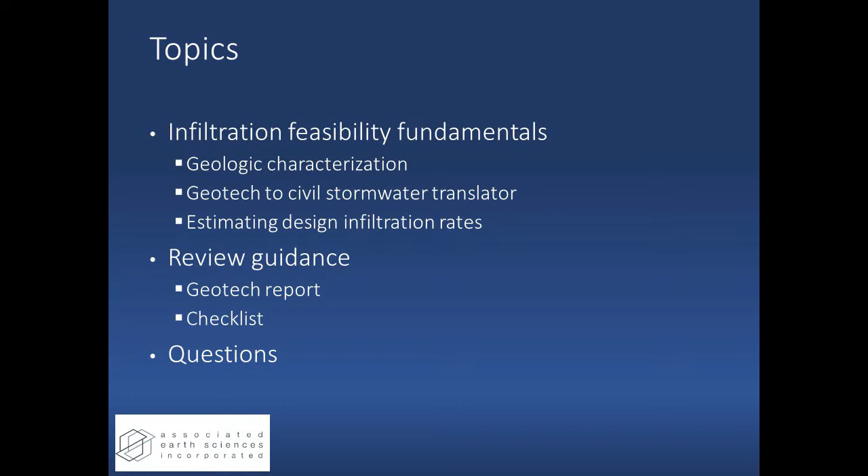Thank you for going through the abstract. That just covers what we're going to talk about today. So I'll just keep on going because there's a lot in there that I want to cover.

So as a geotech, I'm a hydrogeologist, work with geotech engineers. Hydrogeologic characterization, geologic characterization, it's, from our perspective, the #1 part of the stormwater plan. A lot of this conference has been on the water quality components. This is all about flow control. So when we want that water to soak in the ground for flow control, when it's infiltration, that's where the subsurface characterization is very important.

Think about the ground as your underground pipes. So the pore spaces between grains, the layers of materials, that's your pipes. And you need to understand how they're deposited to understand their flow carrying capacity. So these 3 bullets, thickness, lateral extent, where's the perching layers and the water table, and then that permeability in the vertical direction, those will be themes we'll touch on throughout.

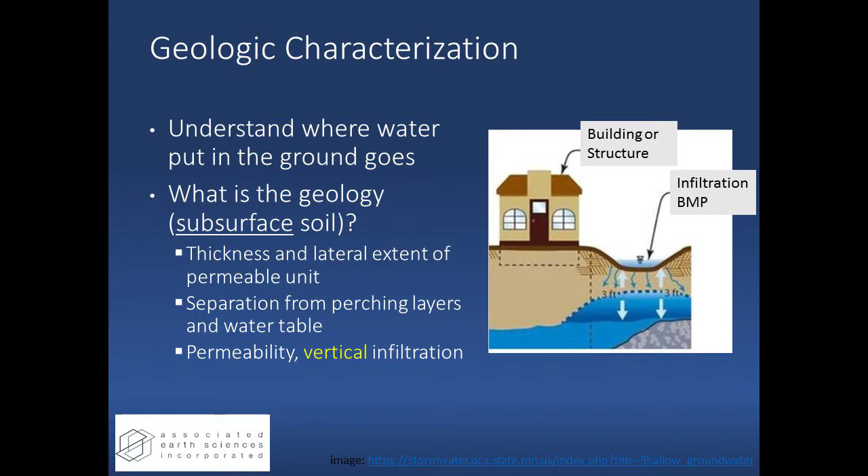So who knows who Karl Terzaghi is? Geotech engineer, father of geotechnical engineering. So this was an engineer who recognized that how sediments are deposited are key to predicting their behavior between widely spaced boreholes or widely spaced tests.

It's really hard to predict the subsurface because you can't see it. You get these little tiny windows into the subsurface. How do you predict conditions between those 2 locations? It comes back to understanding the geology. How were the sediments deposited?

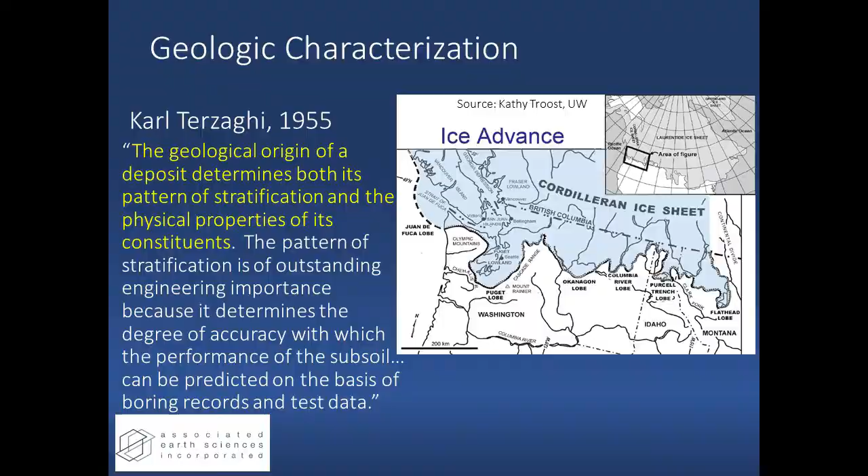So this is a Puget Sound centric talk, but the concepts here apply statewide. But Puget Sound in particular, we had the glaciers come down over 6 times in the last 2 million years, and they left behind a very complicated subsurface story. So I want to just lightly touch on this because there's 2 key units that the ice sheet left behind.

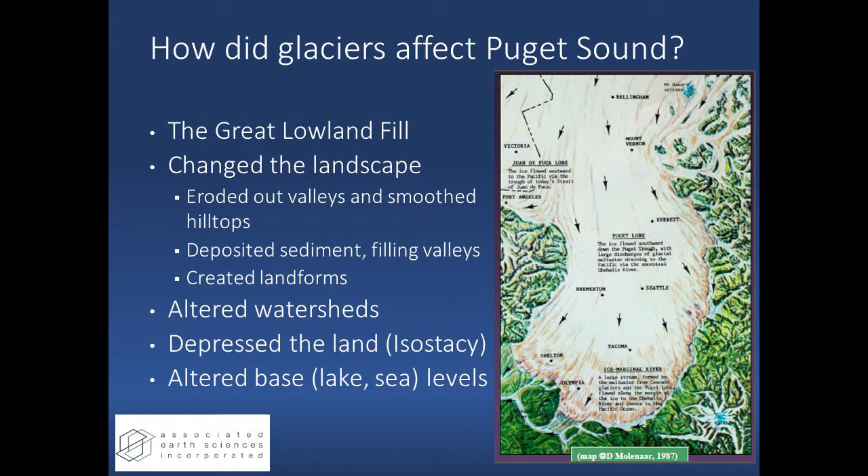Derek Booth, a local yokel, worked for King County, went off and is a worldwide expert now on stormwater, but he worked at the county in the 80s and then UW in the 90s, and spent a lot of time characterizing geology and groundwater flow. And so I recommend that everybody read his paper. It's really good. And it forms some of the basis for the hydrology we see locally,

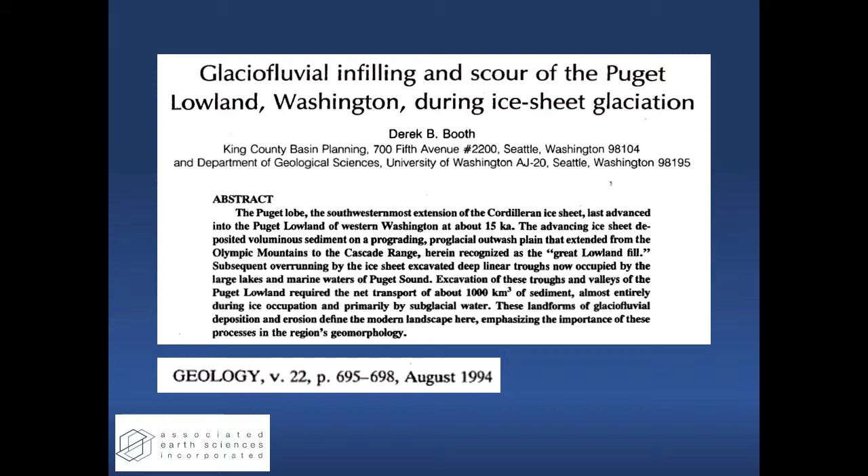and it helps understand how facilities will perform. So those two key units, glacial outwash and then glacial till, those will also be repeated here. So outwash is deposited from the ice sheet, from meltwater streams outwashing in front of the ice sheet. That's where outwash, the term, comes from.

So sediments deposited in front of the ice sheet as it's moving south or as it's retreating north are water sorted. Why is that important? So when you sort sediment, you create layers, you create stratification.

You've got zones with very little fines. The fines have been winnowed out by the action of the flowing water. There's also areas where you have still water and fines accumulate. And so it's a very heterogeneous, highly variable, laterally extensive unit, so the outwash.

Advanced outwash is over-consolidated for the geotech engineers. It's been consolidated by the weight of the ice sheet. Recessional outwash, normally consolidated. It's loose to medium dense. Its geotech properties are different. Advanced outwash, since it's been compacted, all the pore spaces are smaller. There's less space to move water through it. The fine-grained layers are low permeability because when you compact something that's silty, you really seal off its permeability.

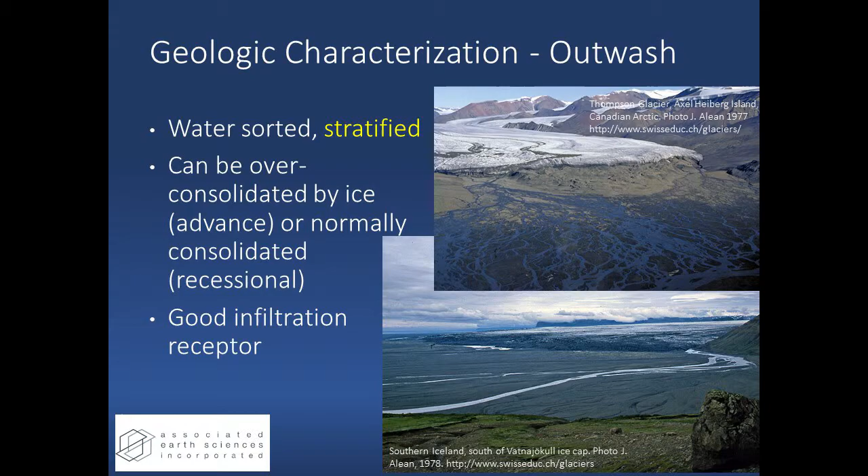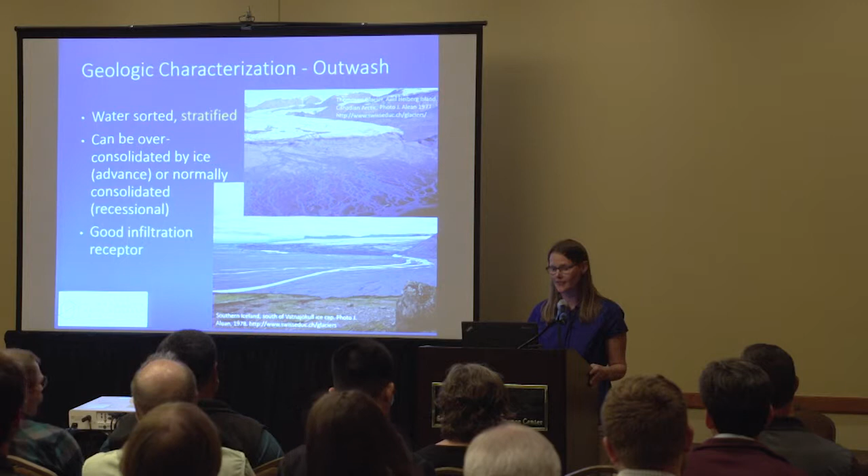Recessional outwash wasn't consolidated in the same way. So recessional outwash for the same grain size will have an order of magnitude higher permeability because the pore spaces are larger. And in general, outwash is a good place to put your infiltration facilities. It has a good permeability when it's not saturated.

So on the flip side, glacial till. Glacial till is formed at the base of the ice sheet. As the ice sheet moves south, it is compacting and scraping and pulverizing. It's like a bulldozer. Glacial till is nature's concrete. It's hard pan. People do not like to dig fence post holes in glacial till. It's hard. It has a bimodal particle size distribution. That's the word of the day, bimodal.

So the matrix is a silt to a silty fine sand, and it's been compacted. And you've got these larger particle sizes kind of floating in that matrix. In the stormwater manuals, glacial till is the recommended material to build earthen dams. Glacial till has a very low permeability in the unweathered condition. So that inch to inch and a half a month, that's what USGS has measured for recharge vertically through glacial till.

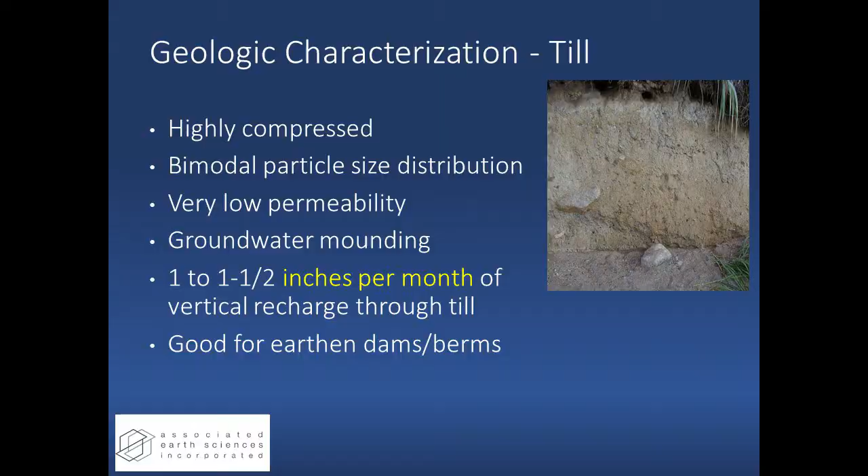So that's the geology. So when we do site characterization, the geotech comes out, does their work. The civil is doing work at the same time, and we need to be able to talk to each other. So civils do the drainage report, civil stormwater engineer, and they have a surface water model that uses soils to predict runoff. So the soils in glaciated terrain are less than 10,000 years old since the ice retreated. They're not the same as soils in the south. So our soils directly relate to the parent material. And so that parent material is typically your till or your outwash when you're not in a modern stream valley.

So the ABCs of soils, the type A soils are outwash soils. So Everett, Indianola, Spanaway, those are all soils formed from the weathering of glacial outwash. And then your type C, for the stormwater model, type C looks at the Alderwood, Harstine, and Tokul as type C soils. Those are formed from the weathering of a glacial till soil.

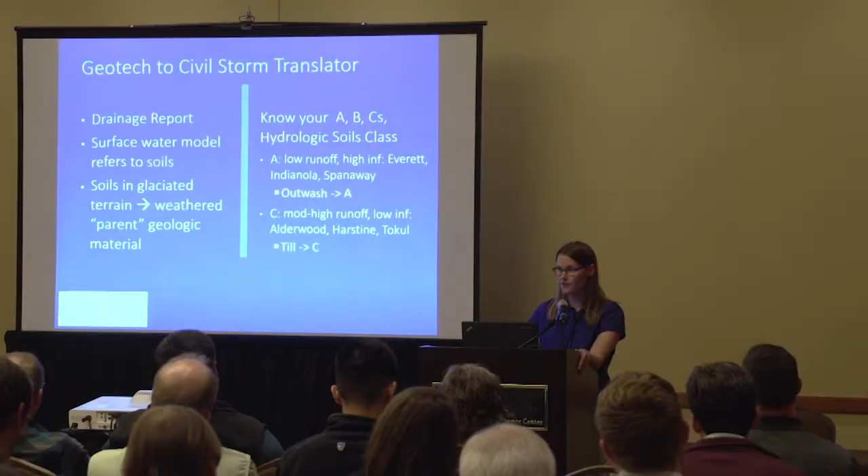So this cartoon is our picture of water flow on a type C soil site or a glacial till site. Stormwater models are trying to mimic the pre-developed condition. So under the pre-developed condition, there was a thick weathered horizon on top of that glacial till. That weathered zone in a true forested condition prior to logging was probably 6 feet thick. And it was a sponge, nature's sponge. It was a really good place to store rainfall and slowly release it.

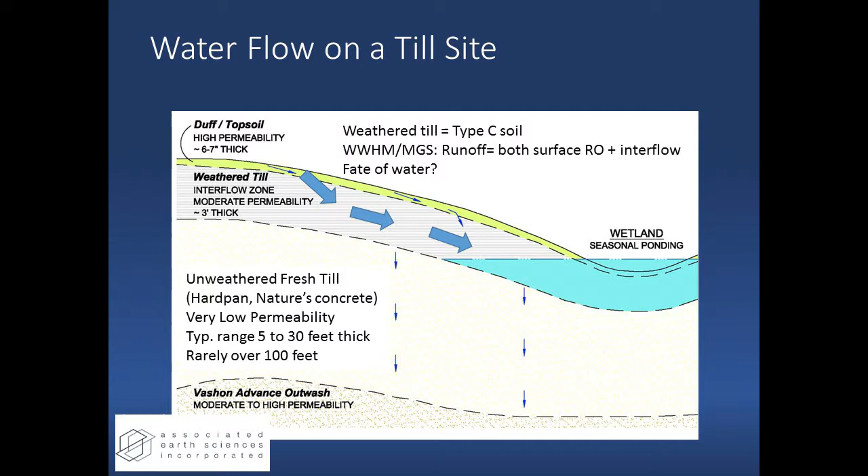It had a moderate permeability, and once water got in there, it could move laterally along the top of the unweathered till. And it provides the base flow to wetlands and those small headwater streams, intermittent in the winter, as the interflow is releasing its water to those drainages. And then beneath that is the hard unweathered till, nature's concrete. It perches groundwater. So that till, if it had an infiltration rate on the order of a 1/4 inch an hour or a 1/10 of an inch an hour, we would not have any wetlands. They would just dry up. So it's really important to understand the weathered till horizon versus the unweathered till. Two very different permeabilities.

So going back to the subsurface characterization, this is what I want to talk about today, is what to look for in your geotech report and your civil reports so that your site characterization is consistent between the two technical documents. So the goal of flow control is that it work, and that we don't have high runoff rates to our streams and to protect our salmon, but it's also because we want facilities that work. We don't want drainage complaints, and we don't want lawsuits on neighbor properties. And so when it doesn't work, it is no fun at all. So the upper cell, not selected for study.

This was one of the facilities we looked at as part of the participation in the Stormwater Action Monitoring project. So we reviewed many built bioretention facilities across Puget Sound. This one was not selected for study because there was some trouble. The upper photo is the excavation for a bioretention cell that's going to be built. They excavated through the Alderwood and into the fresh, unweathered glacial till.

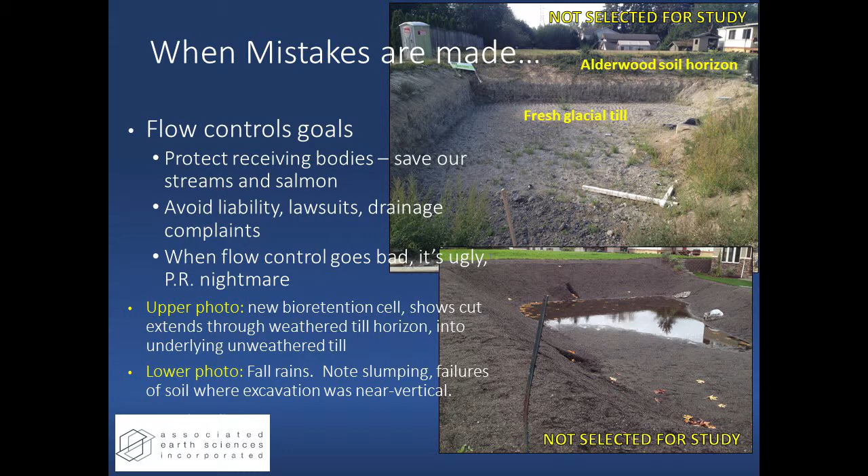The lower picture, they've placed the topsoil. The bioretention soil hasn't been planted yet, had a storm, and some problems started to appear. You can see these little divots on the side of the cell where that soil is starting to fail. And it has standing water in the bottom of it.

And so a year later, there was trouble with it, and there was a stop work. All the soil is gone from the sidewalls. It's not draining. It's a really good detention facility. So in that sense, flow control is achieved, but it's not what anybody wanted to see.

So where should this water have gone? When it gets high enough, it can access the weathered horizon. And then in the lower photo, this block wall is off to the side, and there's seepage at the base of the block wall, that lateral flow.

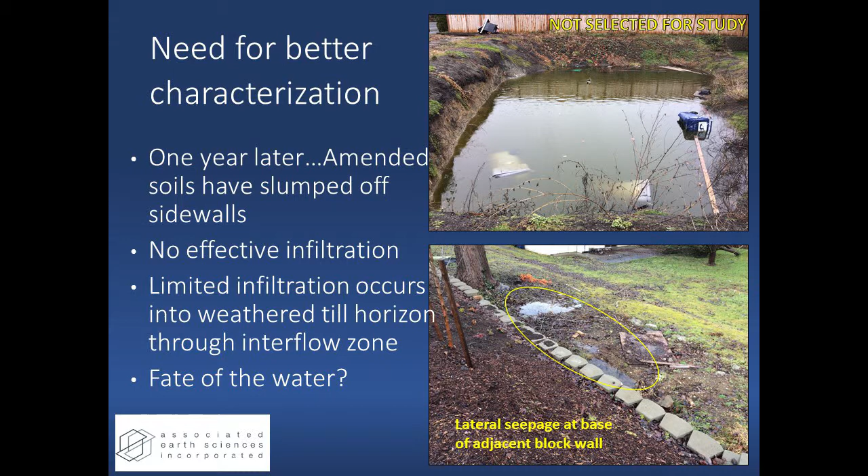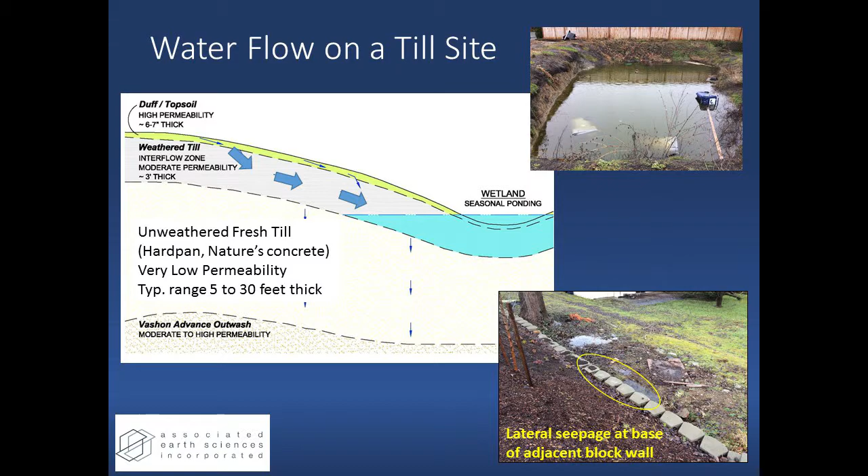So this is that picture again. Just want to hammer this home, that the interflow horizon, the weathered till, has a moderate permeability, but it's lateral. The vertical permeability, it hits that unweathered till, and it just isn't a measurable rate in how we want it to be for a stormwater control facility.

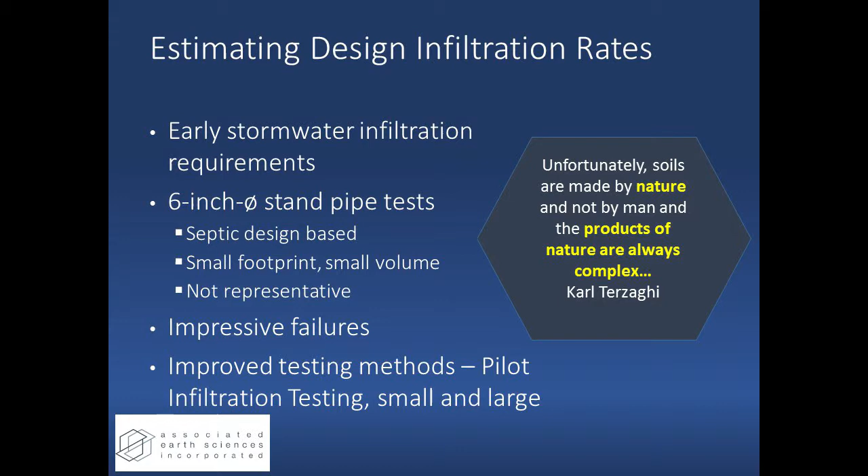So how should we estimate infiltration rates? We could spend a whole day talking about how the way infiltration rate estimates are provided has shifted over the years. Historically, there was a lot of literature from septic and agricultural purposes, low dosage applications, small diameter tests. For stormwater facilities, they're not representative, and there were some pretty impressive failures in the 80s and 90s, and that's why King County led the charge and came up with a better, more representative way of estimating infiltration.

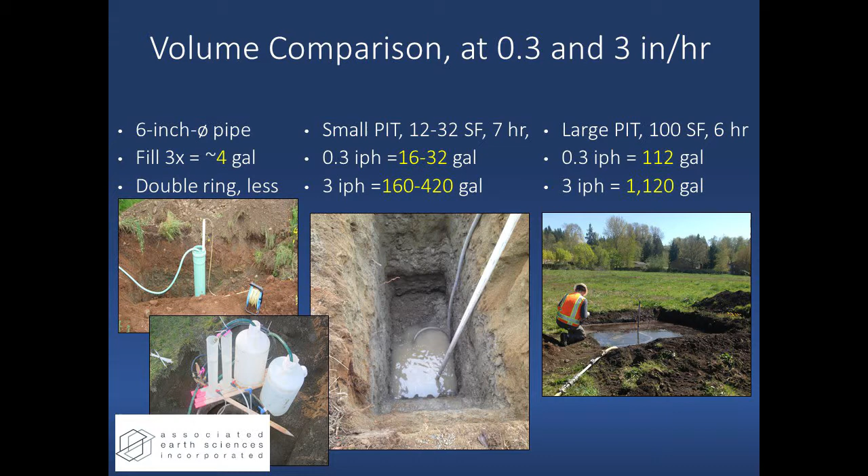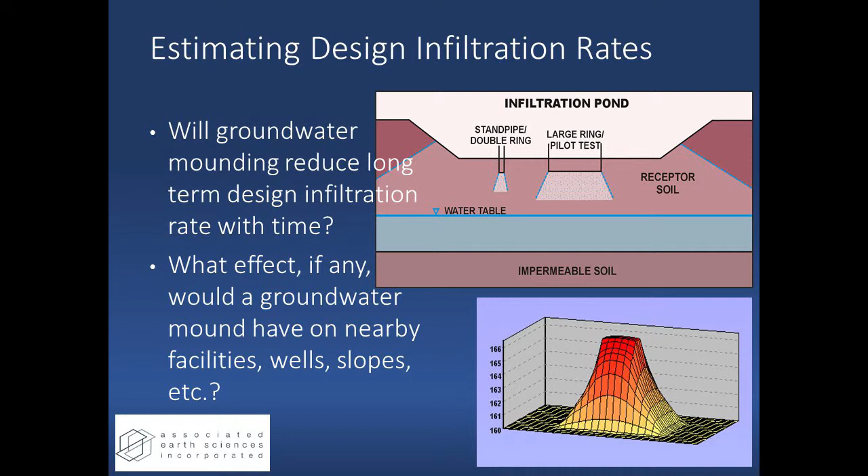And then on the far right, you've got the large pit, just a different scale. A lot more water is put into the ground. You're stressing the system. The number you get is going to be more representative. So a couple of cartoons trying to illustrate that concept of how much area you're affecting with the different types of tests. So this is just context for when you're looking at infiltration rates that are provided to you. Understand how much water was used.

And then grain size. What about grain size? Grain size is a cheap way to estimate infiltration. That's why everybody wants to do it that way. And context is very important. When you sieve a soil, you're homogenizing or averaging any sort of layering it might have had in its natural condition. And I'm a data miser. So for the last 10 years or so, when the Massmann formula came out, we started compiling pilot infiltration tests and grain size data, just to see how it compared.

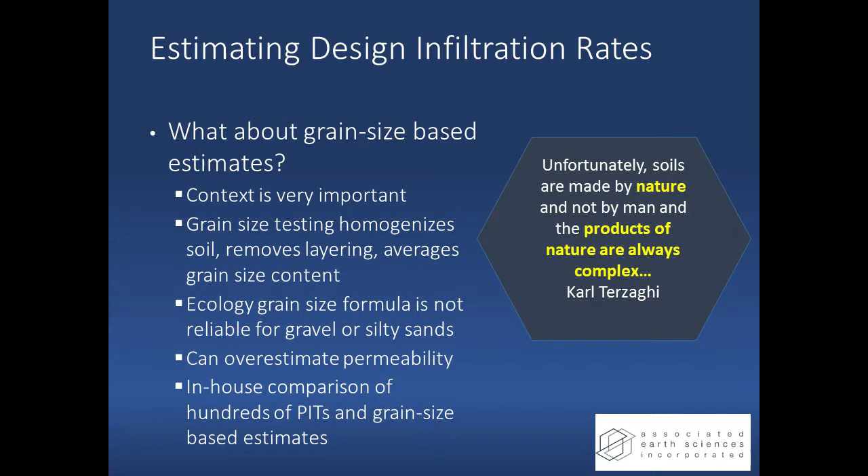And what we've seen over and over again is that the grain size-based formulas overestimate infiltration when the soil is silty, or if it's gravel, it kind of falls apart. It's too coarse. So you just got to use caution with grain size-based estimates. They should be heavily factored, and hopefully the soil is pretty homogeneous. Then you're being conservative.

So for infiltration projects, this is what you want to see. You want to see a good description of the soil. Hopefully there's a geologic unit attached to it. Is it stratified or not? And is the rate measured vertical or horizontal or not discussed? Where's the water and where's the water going? A couple of photos here of stratification. These are both of advance outwash, so an over-consolidated material, and a lot of different permeability exposed in that cross-section.

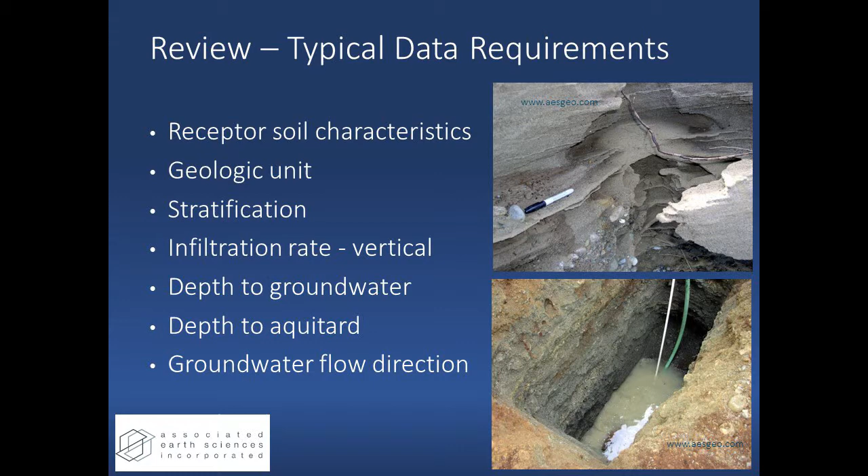So who reviews geotech reports? There's a lot of variability. The standard of practice is highly variable, but in general, there's 3 types of reports that we produce as a geotech and that I see when I review other people's works. And it's a pretty basic, this is what we've got, this is what we think for feasibility. Then the next phase is, okay, we think we've got something that'll work. Here's our design information. And then there's the single family geotech reports. So 3 pretty different apples.

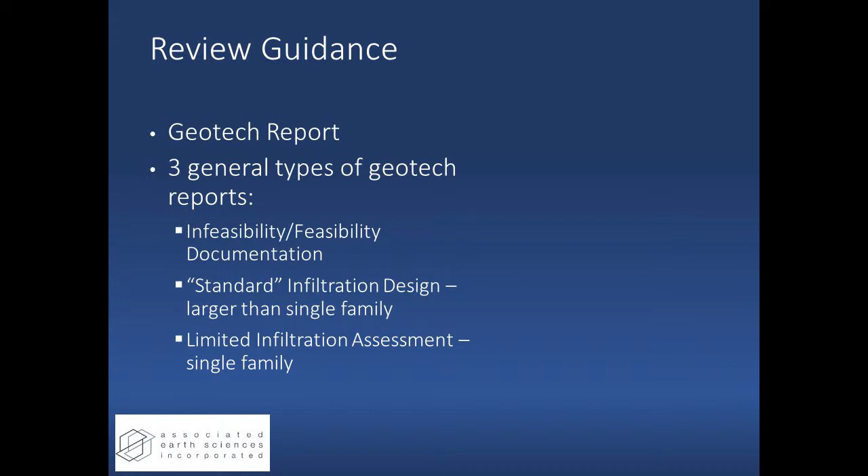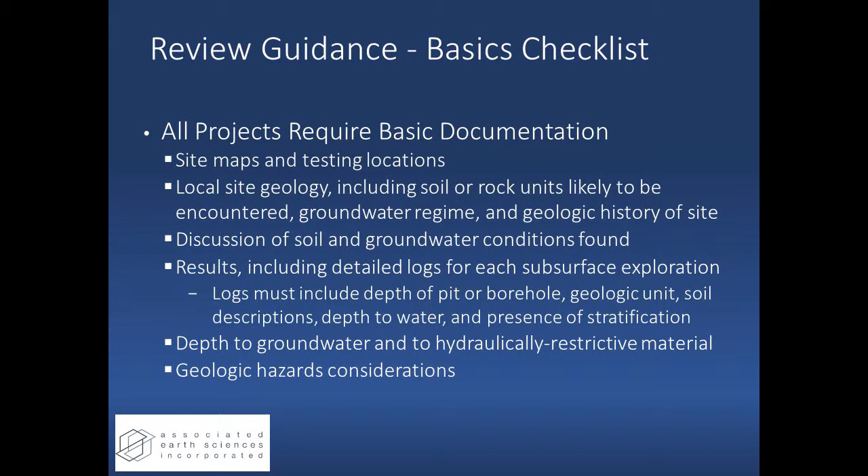In that first one, this is just kind of a list. Okay, so this is what you should expect to see. Pretty basic stuff, maps, logs, generic description. What I want to spend time on is what we should expect when we're actually doing an infiltration design. We're not trying to prove it doesn't work or it does work. We're actually trying to provide design information. So a key one is, what's the basis for the water level? Does the water move up and down, and where are you in the season?

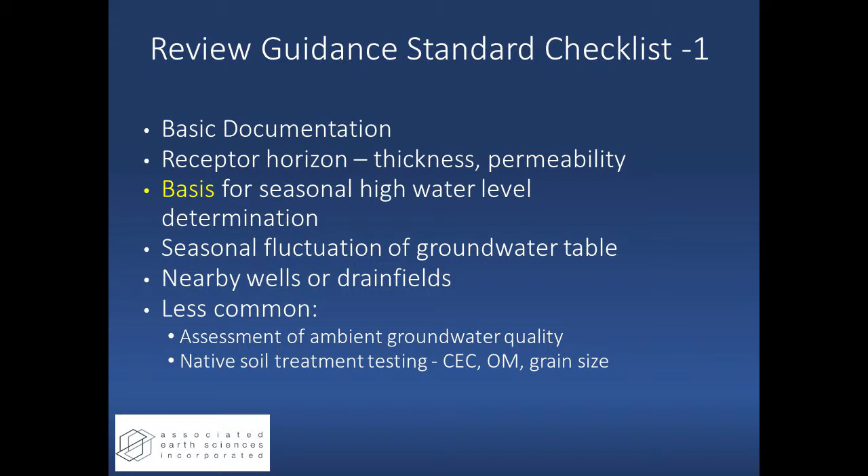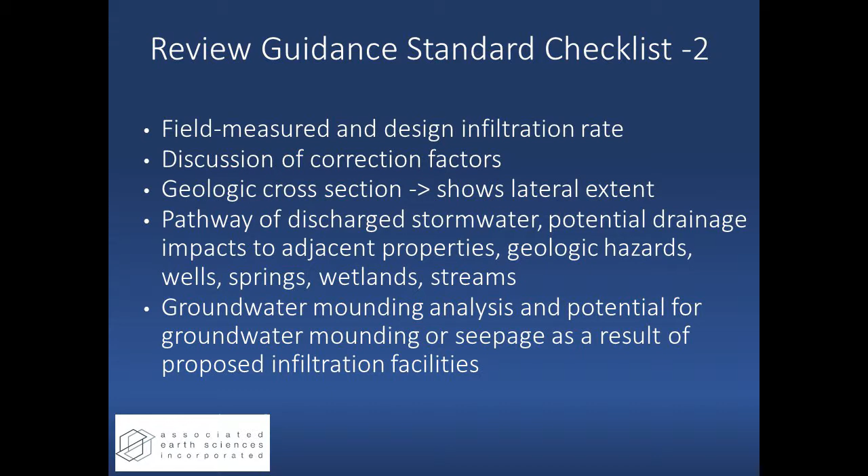For single family, you know, they're just different. It's smaller amounts of water. Single family infiltration, there's a lot of prescriptive sizing based on grain size, but the grain size basis is the USDA, not the Soil Conservation Service, but the Natural Resource Conservation Service textural triangle. And it works great. It's conservative for gravel, and it's conservative for medium to coarse sand, but it's not for the finer portions of the triangle. So just caution, caution, caution.

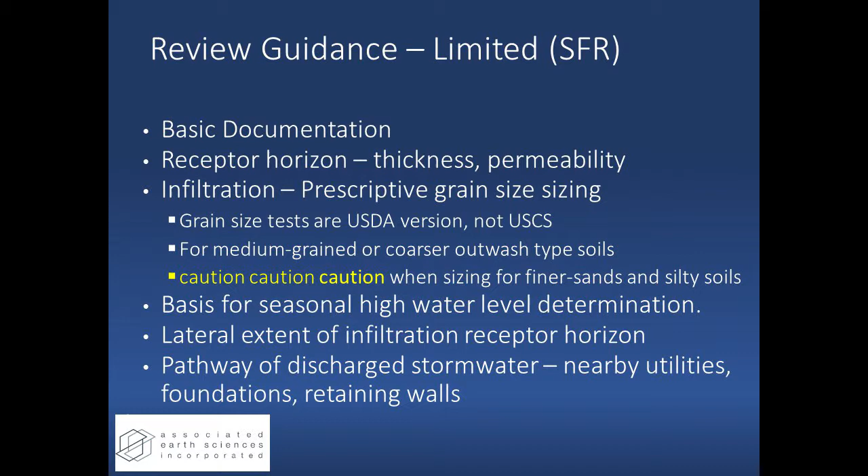And let's think about that. For another talk, it would be, why are we using septic-based design parameters for stormwater flows? Septic is based on low dosage, regular low dosage, and the drain field is just a bunch of infiltration trenches. When you think about it for stormwater, it would be wonderful to have a sanitary person compare the amount of water we're talking about for septic versus what we see from roof areas under storm. That would be really interesting.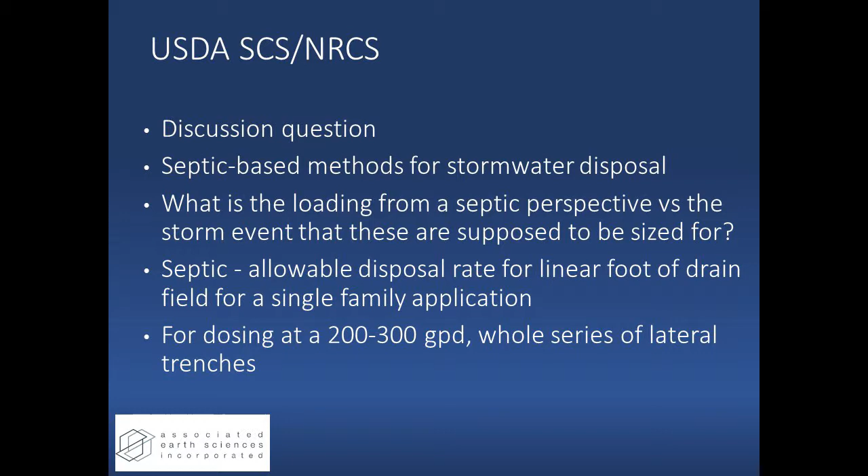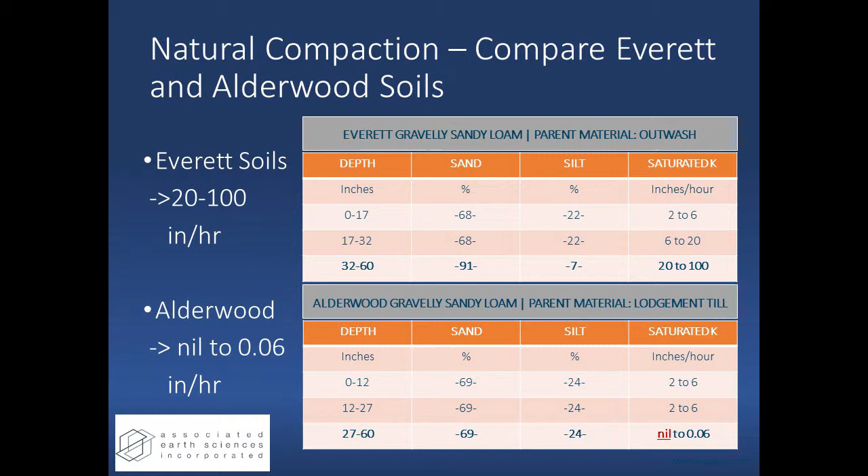So the last slide to think about when you're looking at those two pieces, the geotech report and the storm report, look for disconnects. So if the geotech report doesn't talk about the way they got the infiltration rate or the amount of water used for testing or where the water is going, then you should have a comment letter that says, give me some more information about the basis here. If the drainage report has a class type C soil for the runoff, but they've got the infiltration box checked, then that means we're putting water into the weathered horizon, and that means it's not moving vertically. And so there's a disconnect there that should be discussed.

And then, is the grading plan removing the zone that was tested? I don't know how many times I've seen tests done, and then to make terraced lots, you're just cutting and filling. And maybe they're filling where the facility is going, or they're making a 10-foot cut where they did the infiltration test. Just that basic cross-check is missed because people are in a hurry, and they're trying to get plans in to get that submittal date because they know it takes 3 months for review comments or whatever it does. But stuff just gets missed. So those are things to look for on the review end.

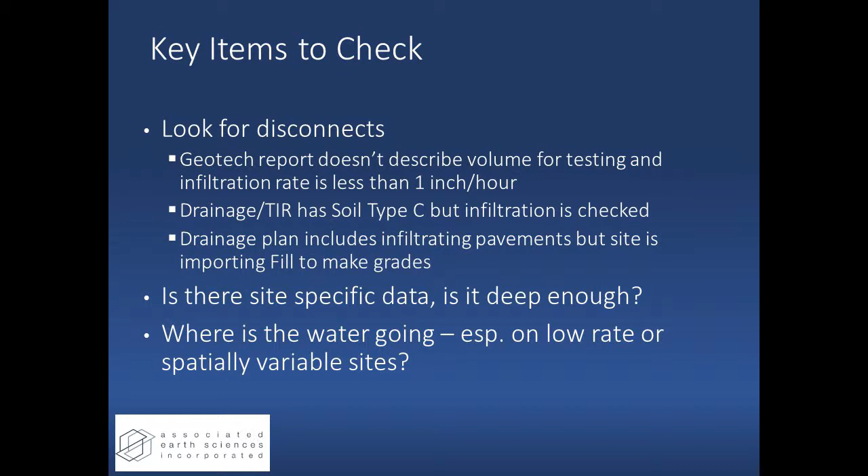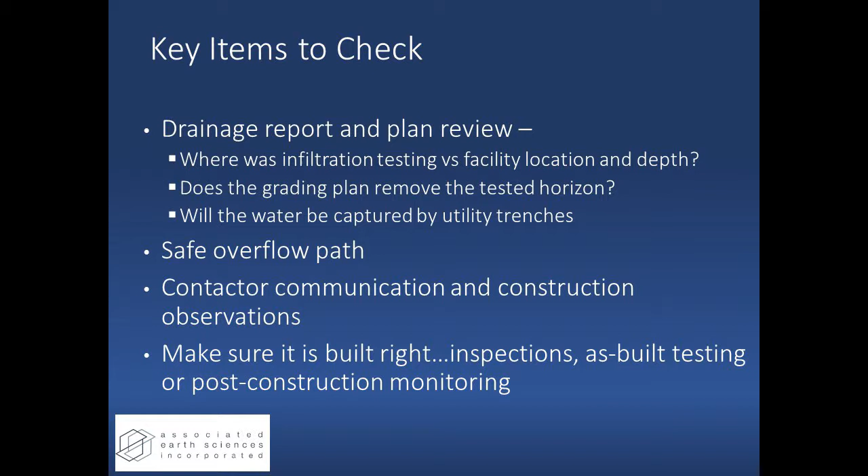But when the infiltration rate is a small number, your review alarm bells should go up, and there should be a lot more questions about where that water is going and does it make sense. Safe overflow path, really important. And then in the end, who's in charge of making sure it's built right? Who's doing the construction observation? And is there a good conversation with the contractor about what this facility is for? It's not the TESC pond. It's the final built feature, and you don't want dirty water going in there.